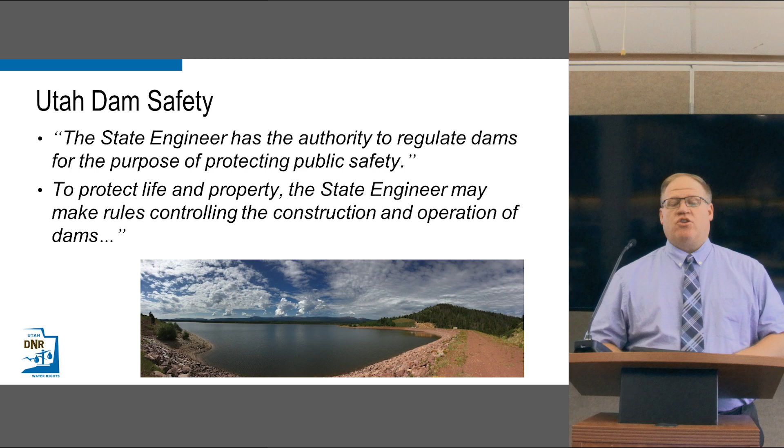And what it boils down to is what it says on this slide here, that the state engineer has the authority to regulate dams for the purpose of protecting public safety and to protect life and property. And so the state engineer may make rules controlling the construction and operation of dams. And those rules are just where we talked about there.

So these administrative rules cover the design, the maintenance, repair, removal, and abandonment. They also cover some other items about standard operating plans, emergency action plans, and it also goes into instrumentation monitoring and reporting of that instrumentation on dams.

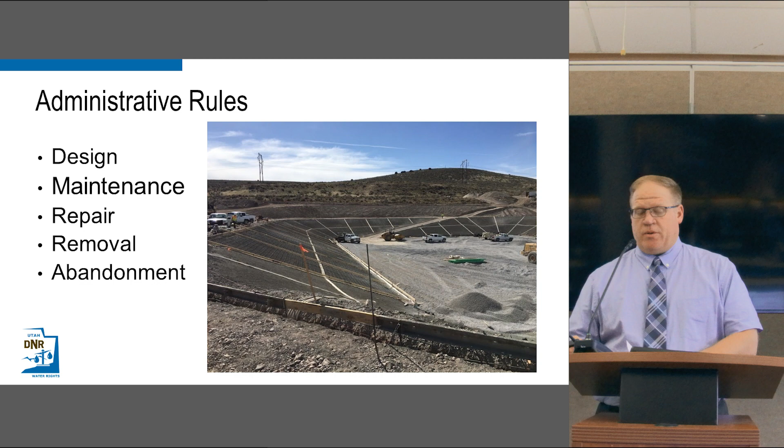I think the biggest thing to take away from this is anyone who wants to construct, enlarge, repair, alter, or abandon a dam must have approval from the state engineer before they start. And it's pretty important that we get in there before we start. And really, the earlier you involve us in the process when you want to build a dam, the much smoother that's going to go.

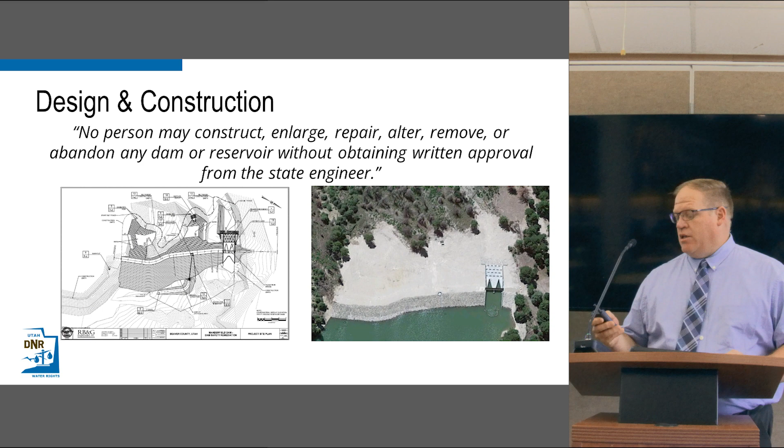So in the early stages, if you're wanting to build a dam, give us a call right up front, and we can start talking with you about what it takes to build a dam and what's going to be involved. So that really does lead into this next item. There's two different processes for approvals for dams. So let's talk about the first one here.

The first one really is a small dam application. And that involves reservoirs that are less than 20 acre-feet, and that if the dam were to fail, it wouldn't constitute a threat to human life. So this is really dealing with a lot of your smaller dams, irrigation reservoirs, holding ponds, along those lines.

What it takes for that is a 2-page application on our website. You can either fill it out on the website, or you can print it off, fill it out, and then send it in to us. And there's some additional information beyond those 2 pages. Really, it's just looking for a map of where your dam's going to be built, and maybe some rough drawings of what you plan on doing, for a dam that meets those criteria.

If a dam doesn't meet either of those criteria, so if it's over 20 acre-feet of storage, or if it failed it could potentially threaten life, then we go more into a formal submission of plans. With that formal submission, there's going to be design reports, official drawings, official specifications for the project, and in that case, the state engineer is allowed 90 days to review that. I will say we are much faster than that 90 days. So we're interested in working with you and getting these projects taken care of as you go forward.

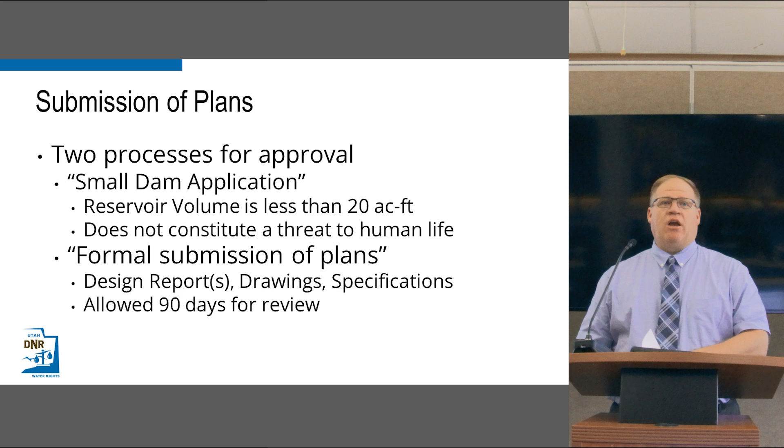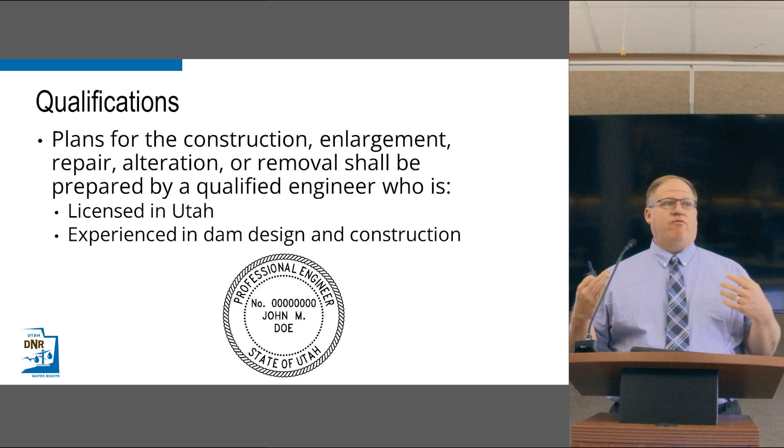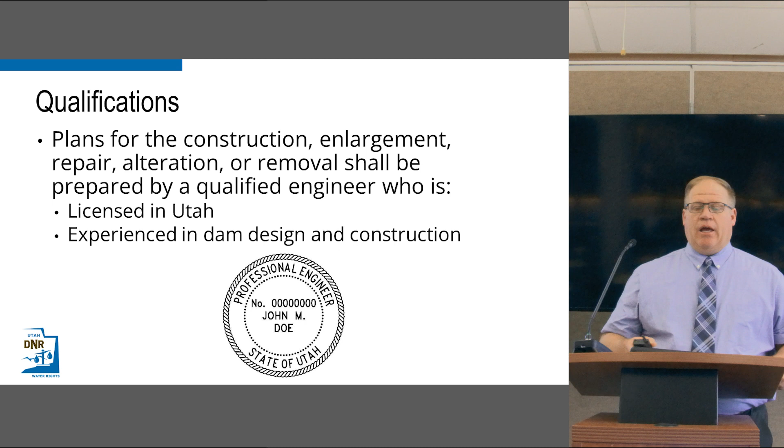Under both of those options, both the small dam application and the larger process, which involves design reports and everything along those lines, plans for the construction, enlargement, repair, alteration, or removal have to be prepared by a qualified engineer for two things. Number one, who is licensed in the state of Utah, and they're also experienced in dam design and construction. And so we just look for that experience, so we know we're getting good, safe dams built.

So once you've got a plan and we've approved it, awesome. Then you go into construction. And so during construction, there's also going to be engineers who oversee the work that's going on, and they submit weekly reports to us. And those weekly reports include the engineer's observations, what was going on for the site, and also any testing that went on for it as well.

In conjunction with that engineer that would be on site during construction of a dam, we as dam safety are going to be involved with that also. We'll be involved in the construction. We'd come out and make periodic inspections, just making sure things are going well, if there's any problems or anything along those lines, and just making sure that the dam construction is following the approved plans and specifications. That being said, we are there to help and assist when those processes are going on.

And if there's an issue that comes up, we like to have a good relationship as these dams are being built so that we can talk and discuss, and if there's problems, we can work things out in a manner that works well for everybody usually. So that kind of covers construction of a dam.

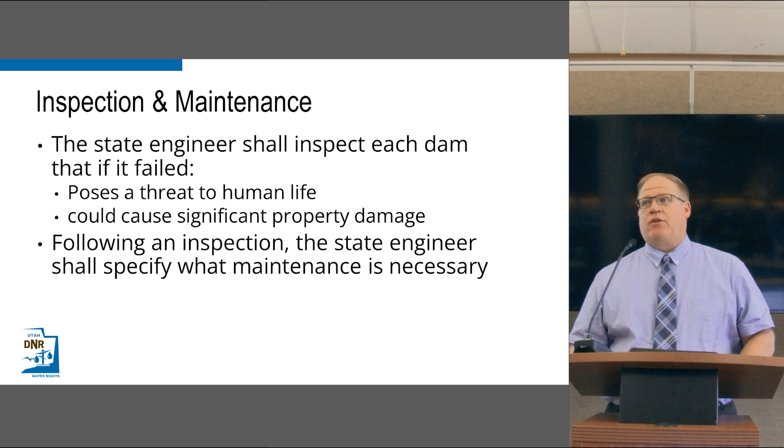So if you build your dam, or there's any existing dam, the division has responsibility for inspecting existing dams, and there's a lot out there. There's approximately 700 dams around the state, 700 plus that fall into this category. But the frequency of those inspections depends on the hazard rating for the dam.

Now, for the hazard rating for a dam, you'll hear a hazard rating of high, moderate, and low. Just because you hear the words high hazard dam, that doesn't mean that the dam is in poor condition. What that means is that if the dam were to fail, there would be a potential loss of life. And so that's how we categorize a high hazard dam. If a dam runs the risk under failure of creating significant property damage but no loss of life, it would be a moderate hazard structure. And if a dam has relatively minimal property damage, it's going to be a low hazard dam.

And so that's how we determine the inspection of dams. High hazard dams are inspected annually, every year. Moderate hazard dams are inspected every 2 years, and low hazard dams are inspected every 5 years.

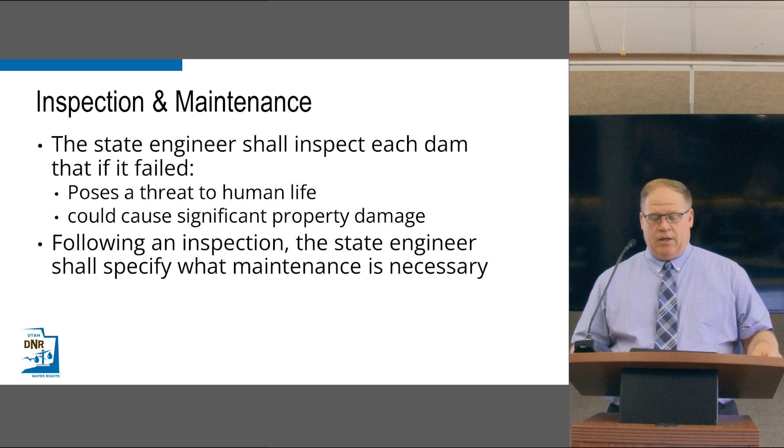For an inspection, we go out and we observe the general conditions of the dam, looking for any changes in the performance or the operation of the dam. And so that really involves a couple of things. That involves the actual boots on the ground, looking at the dam, seeing if anything's changed from year to year. But that also includes looking at the monitoring data for different dams and seeing if anything's changing in there as well.

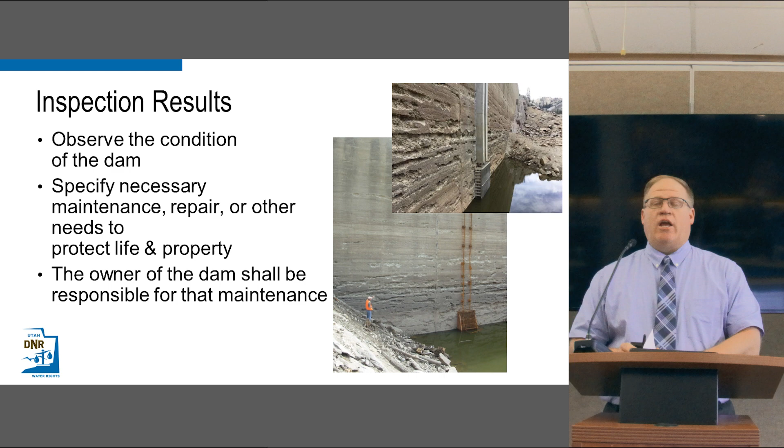Once that inspection is done, we'll put out a report, and in that report we would specify any maintenance, repair, or other needs required for the dam to protect life and property, and then once those items are identified, the owner of the dam is responsible for those maintenance items.

On low hazard dams we don't necessarily require instrumentation. Moderate hazard and definitely high hazard dams we require instrumentation on. This information provides additional data beyond what you can actually see on the ground. It typically gives us information on foundation pressures that are going on in the dams, typically through the use of piezometers.

Piezometers are essentially just a monitoring well into the embankment where we can measure the water level in the embankment. That gives us a good idea of the pressures that are inside the dam, and also drains in the dam just give us an idea of seepage rates through the dam.

Other instrumentation that you might see on a dam are settlement plates. We can see if the foundation is settling, the dam is moving in any way whatsoever, and we also have inclinometers, which are indicative of where maybe we're seeing movement in the embankment or movement on the sides of the dam, the abutments, where there might be a landslide. Those can give us an idea of how much movement is going on there.

But all of these provide really important insight into what's going on inside the dam, and so we can look at that. And so these readings on this instrumentation are also submitted to dam safety, and we review those when they come in and just make sure things are looking good there.

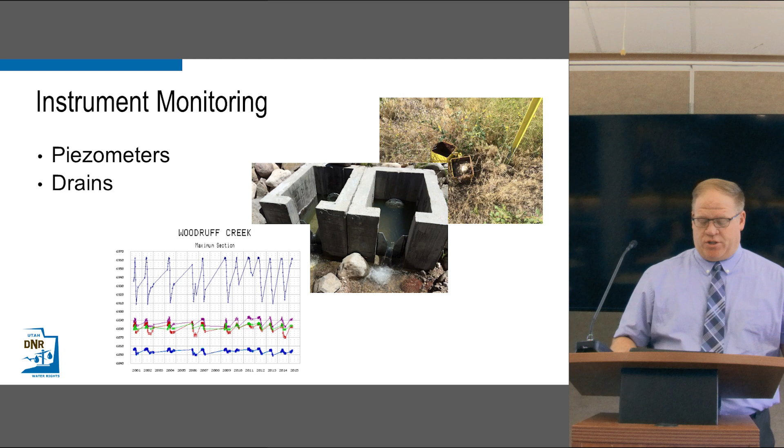So just introducing it here. There's statute code from the state, section 73-3-29, and also administrative rules, R655-13, and they give the authority to the state engineer. I'll read it: a state agency, county, city, corporation, or person may not relocate any natural stream channel or alter the bed and banks of any natural stream without first obtaining the written approval from the state engineer. That pretty much means if you are going to be working in or around a stream, you will most likely need a stream alteration permit.

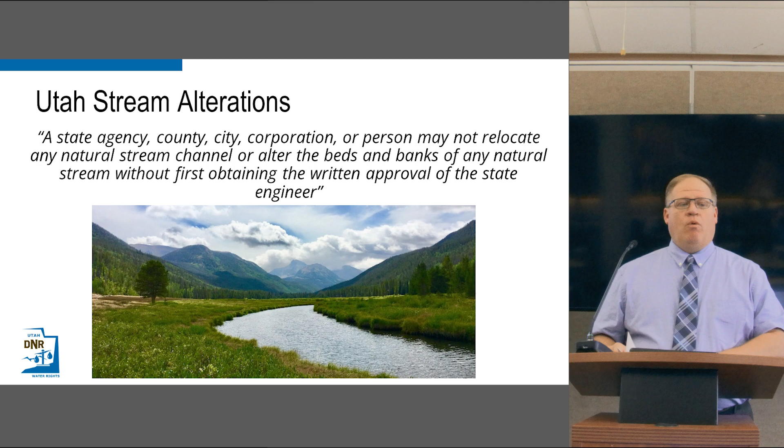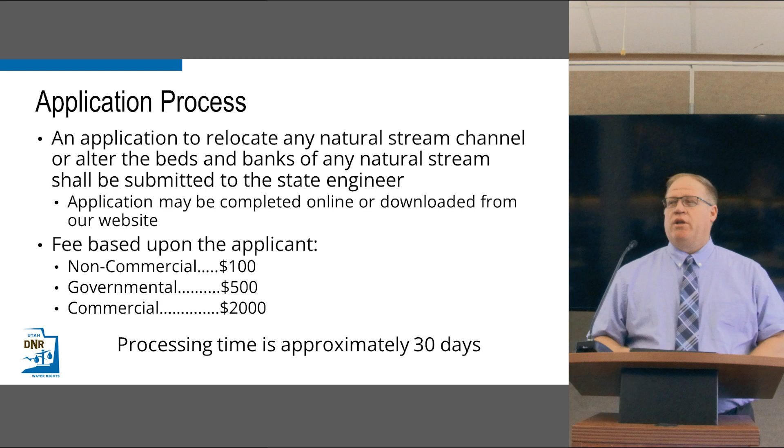And that approval comes through an application process. The application can, again, be completed online, or you can print it, fill it out, and email it in with the fee. As far as a fee schedule goes, for a non-commercial entity, for example a private homeowner that has a stream running in their backyard, it's a $100 application fee. For governmental agencies, cities, counties, it's $500. And for a commercial operation, it would be $2,000. The processing time is about 30 days, and sometimes we definitely try to get those through quicker.

One thing to talk about here: the state statute requires that you obtain approval from the state of Utah for stream alteration, but in all instances you also require approval from the Army Corps of Engineers. Rather than duplicating a lot of work, the Army Corps of Engineers, partnered with the state of Utah, developed what they call the Programmatic General Permit 10, and everybody refers to it as PGP 10. What that does is it allows both state and federal agencies to approve these stream alterations. This application process applies to most things you're going to be dealing with that are minimal impacts to streams.

Maybe some examples are like you're putting in a culvert, or there's maybe a bridge structure or something going in around it, and this joint application typically covers those things for those activities.

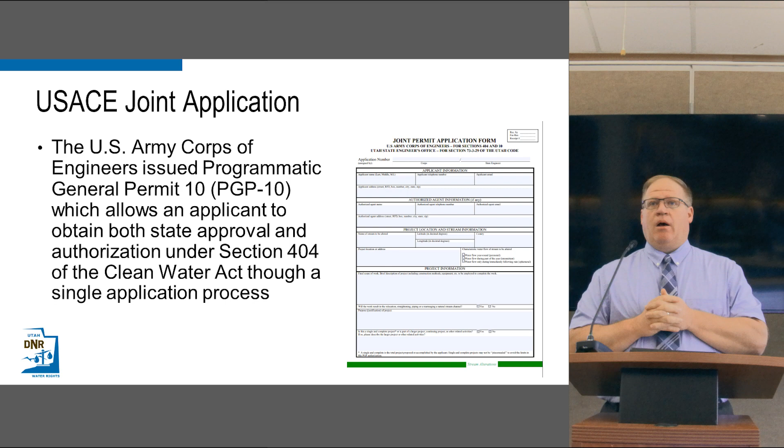However, it does not cover all activities that may be encountered. And so the Army Corps of Engineers may require you to submit a secondary permit with them specifically. I'll give you a heads up, especially if you're getting into the areas of impacting wetlands in any way, and discharging soils onto wetlands, you most likely will have to do another permit with the Army Corps of Engineers.

So really what it comes down to, you need to have an application approved before you alter a stream bank. And failure to get one could result in requirements for you to restore the stream, or additional requirements to bring it into compliance with state requirements.

In talking to our stream alteration specialist, I asked him, what would you like everybody to know today? And he really came down to one thing. He says, we're really here to help you make the best project that you can in the long term, that it's a benefit to you in the long term and the success of your project.

And furthermore, just like I was talking about with dams, if you think you're going to be working in and around a stream, give us a call. We would love to discuss your project with you, talk with you about what's going to be required right up front, so you kind of have a good idea of what you're getting yourself into.

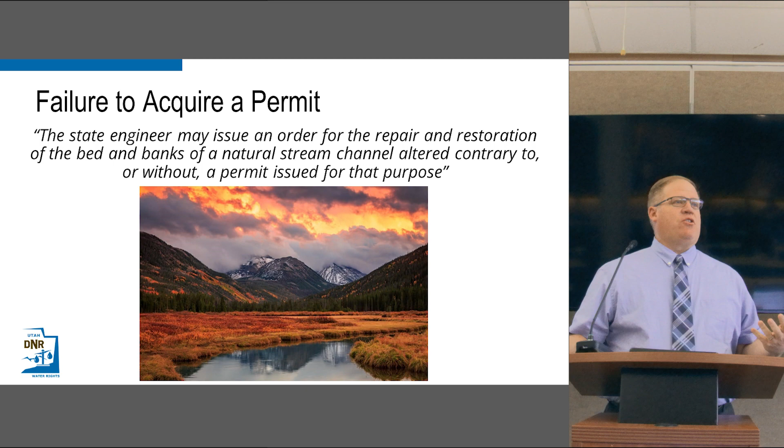That being said, I just made the statement that you have to have an approved stream alteration permit to alter a stream. Now I'm gonna modify that. In light of this upcoming runoff season, this is maybe fairly important. The state engineer can issue, in an emergency such as flooding, like we might have, that we can alter the stream channel, the bed, or bank before receiving official approval.

So if you're in an emergency situation, and this emergency situation is that the flooding is actual and imminent, or it may be threatening the life and health of people, what we ask you to do is contact the state engineer as soon as possible. Now, if the flooding is happening at night and you're unable to get a hold of us, by all means, do the work that's required in an emergency situation, but contact our office as soon as possible to let us know what's going on, and then we can start working with you on that.

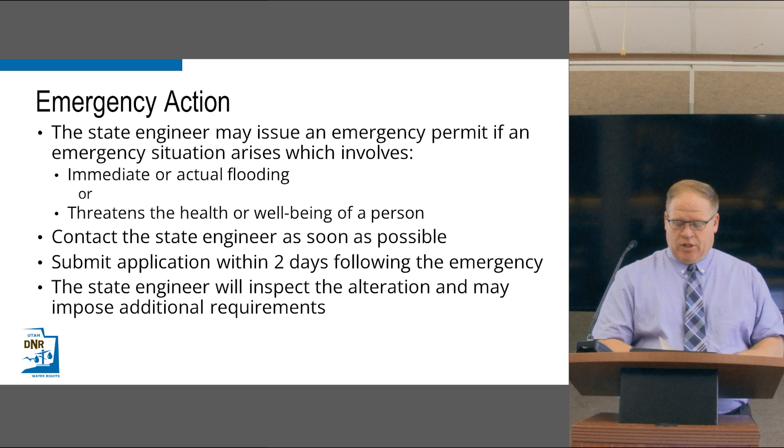And then also 2 days after the emergency situation, work with our stream alteration specialist to submit an application. Then we can look and see what was done during those emergency modifications and help determine what needs to happen going forward. In some instances, it may be okay, but in other instances, there may be additional requirements just to make sure that that stream is fixed right and in good shape. So that's kind of where we bring it to.

I think the biggest thing I could stress is, if you're going to be working in and around a stream, or if you have plans to construct a dam or work on an existing dam, alter it in any way, give us a call. We would love to talk with you about your projects and help you see where you need to go and make it as painless as possible in the process.

So any questions again on dams or also on any stream alteration questions? Everyone's ready to go. All right.